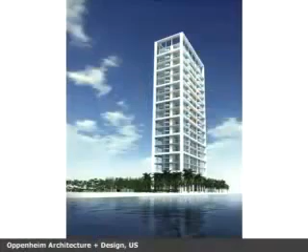We have about 30 architects, and we're all using ArchiCAD. We made the switch a few years back when we were starting to do some of the larger projects and starting to grow the office. It was fortunate for us to be able to do something like that at a nascent stage in our careers, to get into the virtual modeling of buildings and so forth.

I think there's been such a tremendous growth in the appreciation of design, especially in this country in the last 4 to 5 years, that designers and design and everything culturally significant to the art and design world has really become something very prominent in our society, and I think that's a great thing. So I think you're going to be seeing a lot of the reverberation of that tremendous energy, and a lot of great architecture, and more appreciation for the better things and the better way of living and designing.

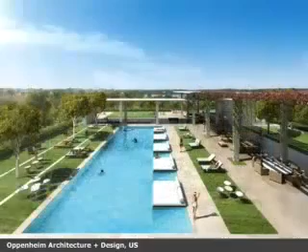Our design philosophy is really an architecture based on experience, and we are very much about creating buildings that are nothing more than what they need to be, only what's essential. I oftentimes make the analogy to cooking when you make a reduction, let's say a balsamic reduction. You boil off all the water and non-critical ingredients, and you're left with the critical flavor and the amazing hyper explosion of taste. That's essentially what we try to accomplish with our architecture, to create it with minimal means but maximum effect and maximum pleasure experientially.

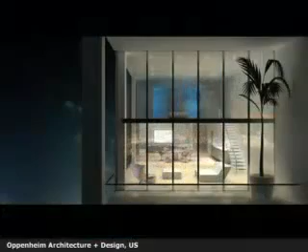That is our objective, and we have a catchphrase that we've used and kind of sticks: it's almost like a romantic minimalism. But minimalism tends to be somewhat cold, and oftentimes people think of modern architecture as cold and absent of the warmth and the charm of traditional architecture. So what we try to do is really deal with the experiences and the feelings and the sensations of how people want to live, work, dream, and create an architecture that supports that and enhances that.

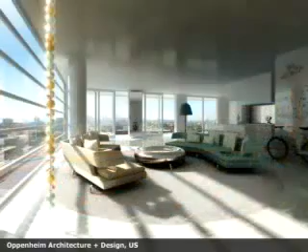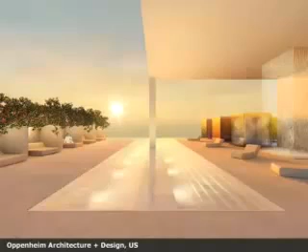We also try to accentuate and create a greater appreciation of a particular context where the buildings sit, both urbanistically from the scale of the pedestrian to the experience of the person in the building, whether it be experiencing the view or heightening the awareness of certain things. For us, we have such respect for the natural world, in that a sunrise or the moon over the water - the architecture just kind of sets that up and frames those types of moments, because those are the ingredients that are very inexpensive to build with. If you can really focus on the romantic beauty of the world, I think the architecture is more servant to that, but obviously it's its own powerful thing.

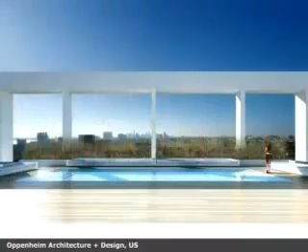I also think that when you're in love, all your senses are heightened, and when I met my wife, she kind of alerted me to all the beauty around me, and I've captured that and express it architecturally. I always missed the 3D capabilities, the idea of being able to visualize things quickly.

So for me, it was a great moment to find a program that would be able to bring together the two-dimensional and three-dimensional components of how one creates architecture and studies architecture.

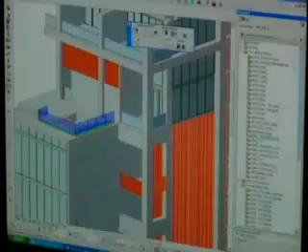For us, in terms of building information technology and the way it affects the market and its future, I think - we've used this analogy before for clients - do you ride a bicycle to get to your office, let's say it's 50 miles away, or do you take your car? We have the technology, we might as well use it to its fullest potential. Creating something virtually and understanding the way it works three-dimensionally, because we are building multi-dimensional elements, buildings - obviously there's time and other spatial information in a building - but you would want as much ammunition as possible to understand what a building is going to be at the end result.

We see a lot of three-dimensional modeling for marketing purposes and rendering purposes, and those are all phenomenal tools, but they're really more for sales as opposed to construction. So I think this integration of multi-dimensional understanding of your ultimate product is something that has revolutionized and will continue to revolutionize.

Hey, my name is Carlos Ramos. I've been with Oppenheim Architecture and Design for approximately 3 years now. I'm a project architect. Building information modeling is definitely, the way I see it, the way to go.

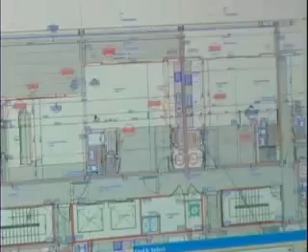Basically what ArchiCAD is doing is allowing me to do what I used to do in school - to build a model inside the computer, and from that model generate all my information, my 2D information, my elevations, my sections, as well as renderings. What most people don't realize is how simple it is to do in a program like ArchiCAD, because you're drawing just like you would on your drafting table.

You have a 2D window where you do your floor plans, but every time you draw something, it has three-dimensional implications. That means when you open a 2D elevation window, it'll draw the elevation for you. So you'd be interacting in the same manner that you would normally build.

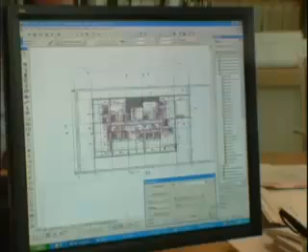Right now, even though we're at the cutting edge of using that technology inside the firm, the product we're delivering to the contractors is still a regular set of blueprints. So I think the next step is when the construction industry also adopts the platform, and we can simply give them the model so they can do all their coordination, cost estimating, and bring it all directly from our building model.

So I think it's a migration process. First, the architect starts to use it, then the consultants of the architect start to use it, and at some point in the near future, we'll be able to hand that to the contractors so they can extract all the information from there rather than from the blueprints.

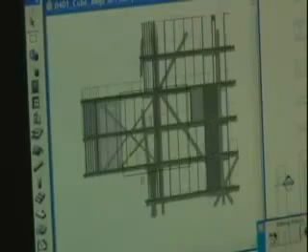In a blueprint, it's very hard to visualize three-dimensionally, especially for somebody in the construction industry. Once they have the building information modeling and all these systems are coordinated and integrated, they've essentially already built it or seen it built inside the computer before they go out and do it in reality. So the closer we can simulate it successfully, the more successful that construction will go.

Productivity enhancements are definitely a byproduct of just using the program. Once you build your model, you generate a lot of your 2D documentation, your elevations, your building sections - that is very productive per se. All you need to do is add the information, the text, the dimensions, and so forth. So it definitely cuts down the time. You can develop something very quickly and generate all the views you need to describe the building very fast. There's a lot of productivity enhancement just from the essence of what the project is.

The other productivity enhancement you see is ArchiCAD's teamwork. Whereas we have a 50-story building - for example, right now we're working on Cube, which is a very dramatic Oppenheim design based on modular cubes that shift around the building, some popping out at different places - some people can be working on the tower portions, on the units, so they can be working on several stories, because you can share it by giving stories to a different team member.

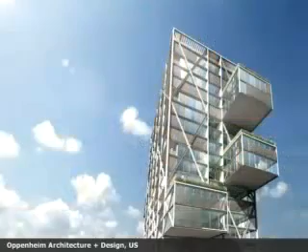The other team member can be working on the parking floors, and other people can be working on detailing, and it's all in the same file. So when they send their changes to the main server, your database gets updated. We're not talking about a lot of different little drawings scattered all over your servers - we're talking about one main file that's being updated continuously, and that's an amazing productivity booster.

The students in school now, what they really should be excited about is how fast things are happening now. If you just drive around Miami, the city is bubbling, buildings are sprouting everywhere - there's a lot of construction coming on board. And if you look globally, what's happening in China, I just went to Mexico City, the same thing - construction's all over the place.

And what is being built - a lot of what is being built are big, highly complicated buildings that are hard to keep track of. So the more skills you have in using a product like ArchiCAD, which keeps track of all this building information, the more successful I would say you would be.

I look for people who are incredibly creative, but I also look for people who have a sort of control or knowledge, or you can determine that they have some sort of aesthetic sensibility, even in the way the resume is written. I throw out resumes that don't have the right font or aren't aligned, because I'm very particular about those things.